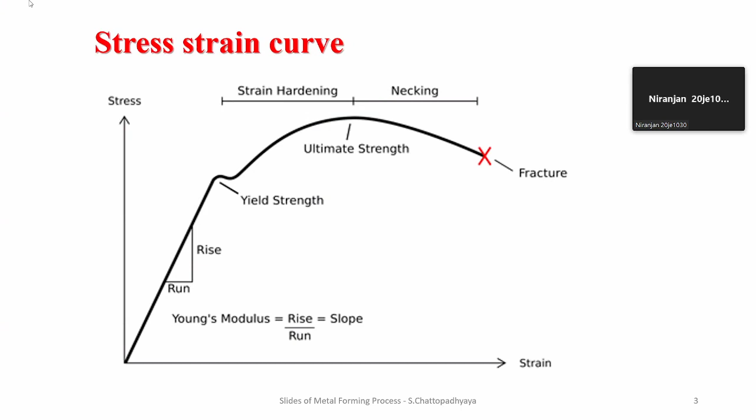Yes sir, you see, again it is the toe region, a little bit of non-linearity is there. And after that, up to this proportional limit, you will find it out. This is the linear region. And after that, up to yield point, if you can divide it in an expanded way, you will find it out. After one point, below yield point, you will have a little non-linearity.

And after that is the elastic limit. Beyond that, the permanent deformation will be there, a little bit of this kind of movement, and after that it is absolutely permanent deformation. And then in between that, we have to work. This is the ultimate one, and then it will come back as a rupture point. We cannot go to that limit because there is a possibility of it coming back again, and the possibility of rupture will be there.

So this is again a little bit of differentiation. This is proportional. The problem is with non-isotropic materials like rock and other things, this is not linear. That is why it is difficult to predict in case of non-metals and ceramics and rock related material, ceramic material, where there lies many non-linearities, and that is difficult to model.

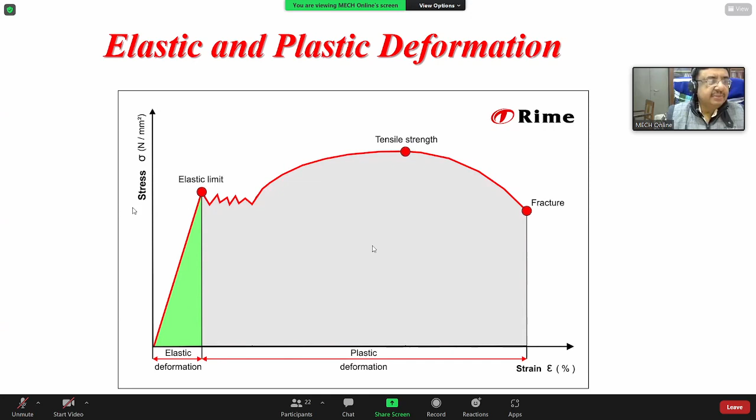So this is the case. It is expressed in Newton per millimeter square, force by unit area. This is the elastic region, this is the plastic region, and there is the fracture. Strain is represented in terms of percentage. Elastic limit, and their non-linearity and all sorts of things will come.

Then you will have this highest point, which is tensile strength. And this is our zone of operation, plastic deformation, but definitely in this side, not in this side, this side.

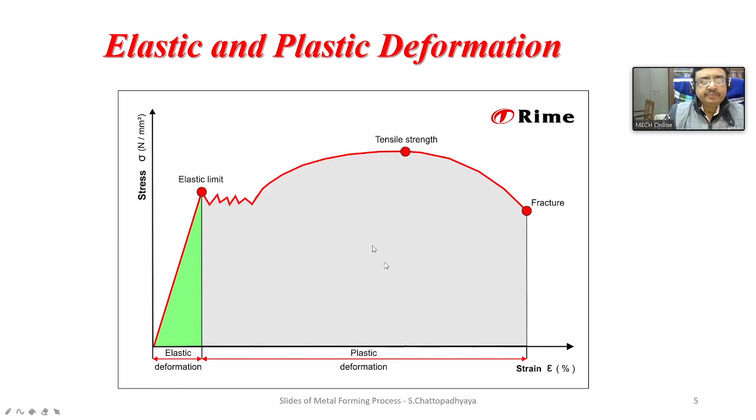So here is the elastic deformation, and this is the flow region. It starts flowing, so we have to calculate these flow stresses related to that, and that is relevant.

The flow stress is equal to K into epsilon to the power N, where epsilon is the strain and N is the strain hardening exponent. That way we will calculate. I will give you some numerical examples also.

And here the strain hardening will be there. Because of this flow, there will be some consolidation in the surfaces, and the surface will be hardened. Difficult to do some scratching, and this portion is known as strain hardening. Because of that, sometimes after machining, you have to go for a stress relieving operation. You harden the surfaces, and sometimes it is not needed because some stresses will be generated associated with that.

In many cases, you don't want that stress to remain, it has to be relieved. In case of machining of structures, one has to do some stress relieving operation and then go for the next machine cut. Why? Because if the stress is not relieved, it will be relieved at some point of time. And if there are holes and alignments important in order to put some shaft there, there is a chance of bending. So you have to stress relieve.

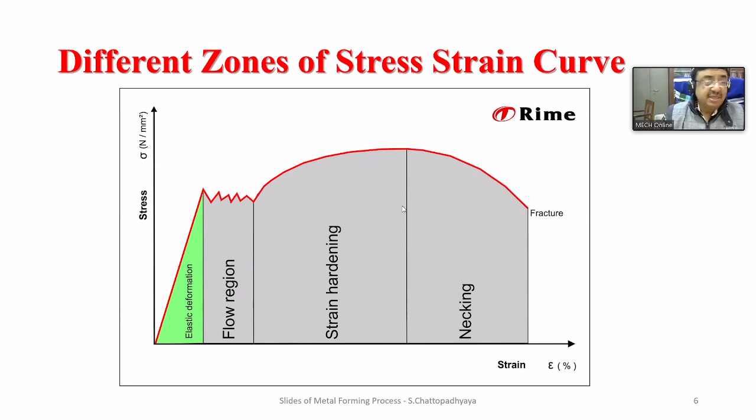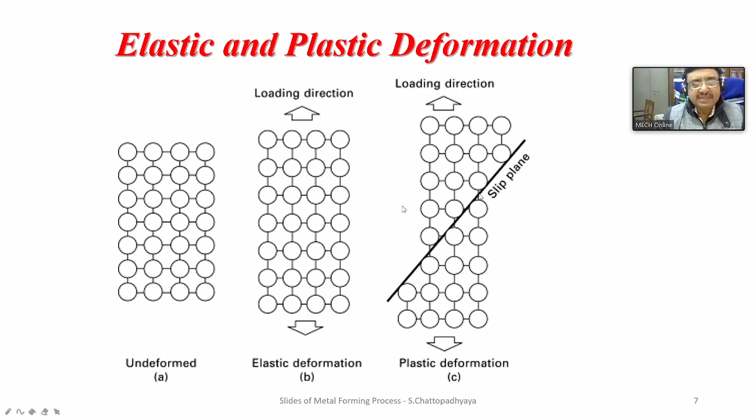Student, is it clear? Yes. So the yield strength depends upon the bond associated with that. Whenever you can give enough force so that you force this slip to occur, that will determine the yield strength. So molecule to molecule, alloy, whatever strength is there, depends upon how much force is really required in order to inflict this slip. And this is the slip plane.

So you can see the elastic, this is the proportional elastic. It is going there and coming back. Elastic deformation, little bit of shifting, but no slip.

Whenever you go beyond the yield strength, you are in the plastic region, elastic plus plastic. There is little bit of disorientation, linear disorientation, layer by layer, and little bit of slip. Beyond that, when stress is removed, it is total plastic, slip occurs.

That is a very good representation. This is the plastic strain, permanent change in the dimension, which we are interested about. Plastic strain will determine the formability of those metals and alloys.

Very good representation. Elastic deformation, elastic plus plastic, and it is totally plastic where slip permanently occurred. It will not go back to its original dimension, and this is plastic strain. Is it clear, students? You will appreciate this throughout your professional career if you are in the engineering profession.

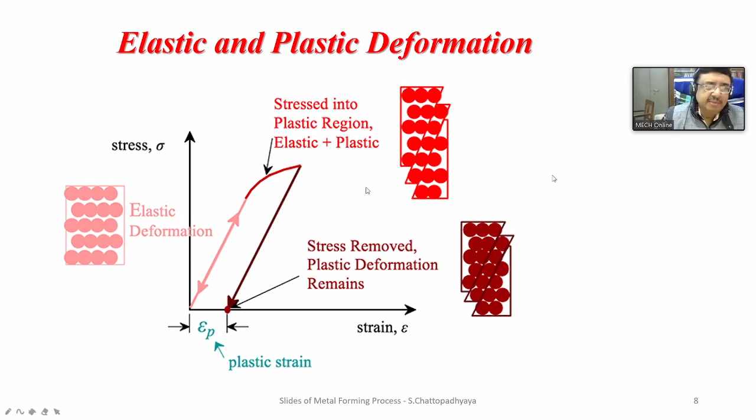But it is the plastic strain. Plastic means permanent. And that is what we are interested about, this plastic domain.

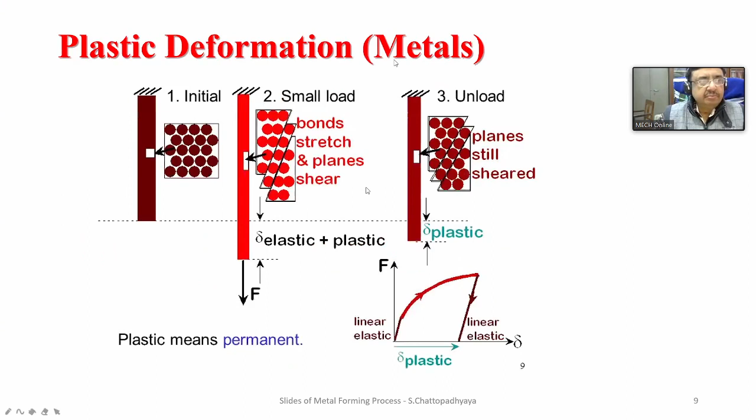So the difference between elastic and plastic deformation process: elastic is deformation which disappears on removal of load. But in case of plastic, it's permanent, which exists even after the removal of load.

So I want you to deform in a plastic way, so that your impression of understanding and knowledge will deform your mindset permanently towards the knowledge enhancement region.

So elastic is the beginning stage of deformation, initial. The plastic deformation comes after the elastic deformation. After this elastic zone is over, then and only then the plastic zone begins, after the yield point.

Clear? It is reversible, obviously, because it takes place over a short range of the stress strain curve and comes back. That is why it's reversible. Plastic is irreversible, takes place over a wide range, a small range versus wide range.

I can show you all those things in a YouTube video. It is irreversible and takes place over a wide range of the stress strain curve.

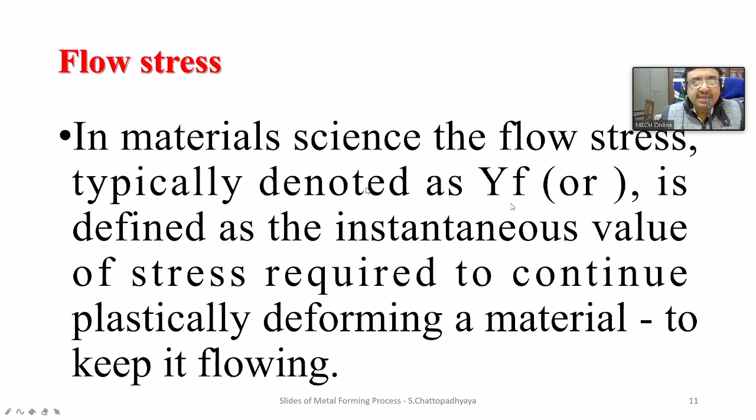Stress and strain in the flow curve are true stress and true strain. In the flow curve, it is true stress and true strain. So whenever you are explaining this thing.

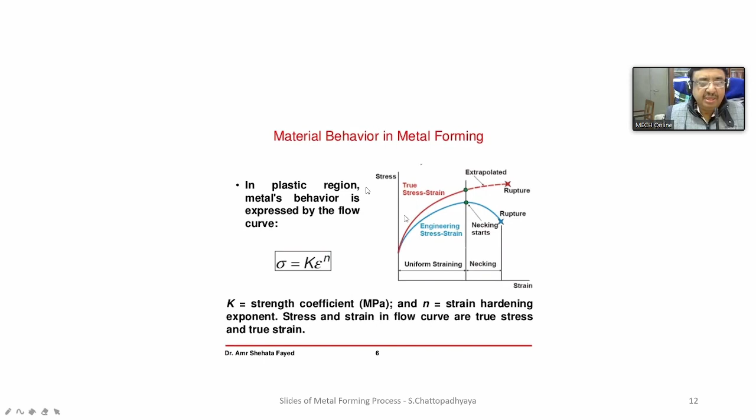So in this first section, uniform straining occurs up to the ultimate strength level, and after that, necking will occur. So engineering strain and the exponent behavior - this is true strain. Engineering strain follows this equation, and true strain and engineering strain relate as this.

So what is slip and twinning, which is occurring in the plastic regime? Slip is the shear deformation which moves atoms in one crystal plane over the atoms of the other by many atomic distances relative to their initial positions. A lot of distance is generated because of the slip, and that is known as slip.

Slip requires lower stresses, twinning requires higher stresses. A threshold value of stress called critical resolved shear stress is required for slipping to take place. Whenever we go deeper into metallurgy, we have to find out what is the critical resolved shear stress required for slipping. There is no such threshold value for twinning to take place, but for slip, there is a threshold value.

If you see the specimen, threadings are done on it. These threadings are done for grip purpose in the UTM machine, the Universal Testing Machine. Before we start conducting the experiment, initially you should note down some things: the diameter of the specimen, the gauge length has to be calculated, and the parallel length has to be noted.

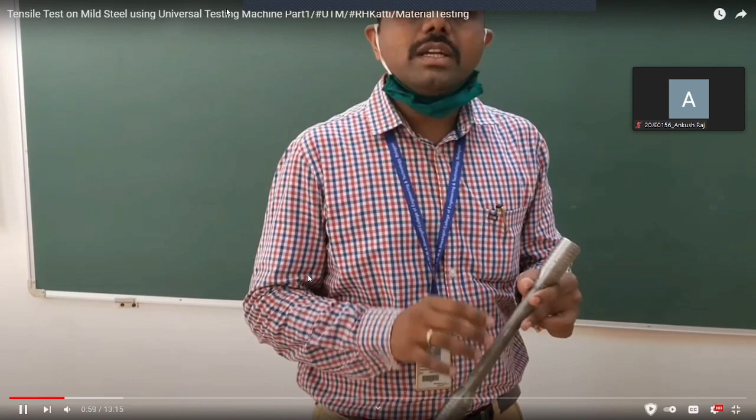Before I start conducting the experiment, you should know why the tensile testing specimen is done, and what you are going to obtain through this experiment. Once you conduct the tensile test on a mild steel specimen, we are going to find out the percentage elongation in the member.

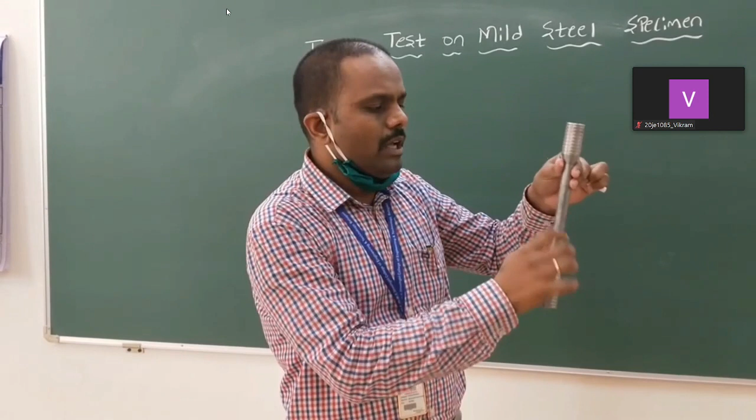When you apply the tensile load on the specimen it will elongate. There will be an increase in length of the specimen, whereas the diameter of the specimen decreases. You need to find out the percentage elongation in the specimen, and the decrease - as I told you, there will be a decrease in diameter. You need to find out the reduction in cross-sectional area, and you need to find out the Young's modulus of the specimen.

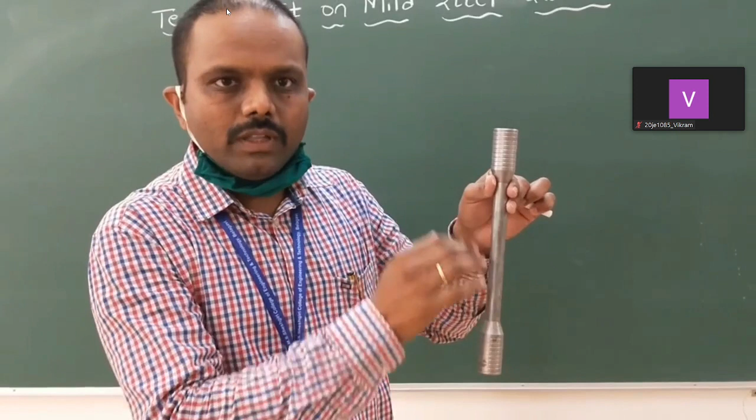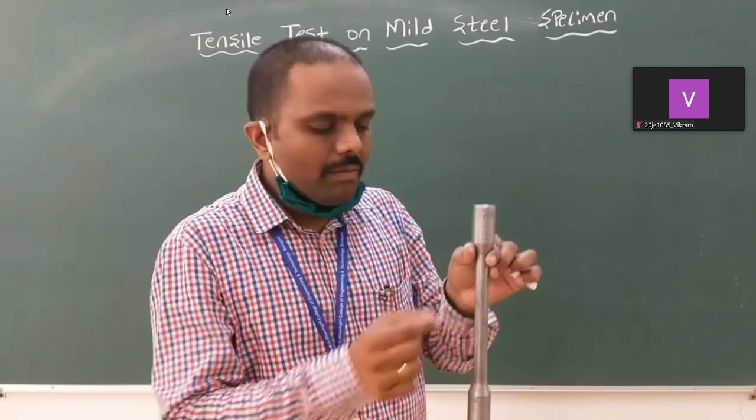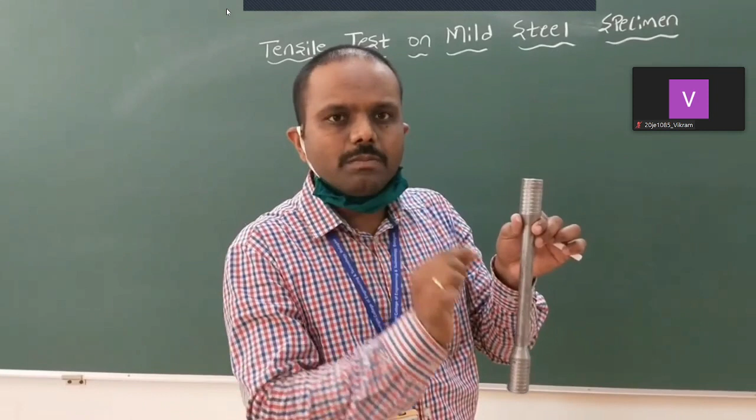During the experiment, when you start taking readings and draw the graph, you need to note down the percentage elongation, and find out the yield stress and ultimate stress the specimen is going to take. After that, we are going to observe the neck formation in the specimen. After neck formation, you will see a small crack on the specimen, and that crack will propagate, and ultimately the material will break into two pieces. You need to note down the fracture point, or the load at which the specimen fractures. This is how the experiment is conducted.

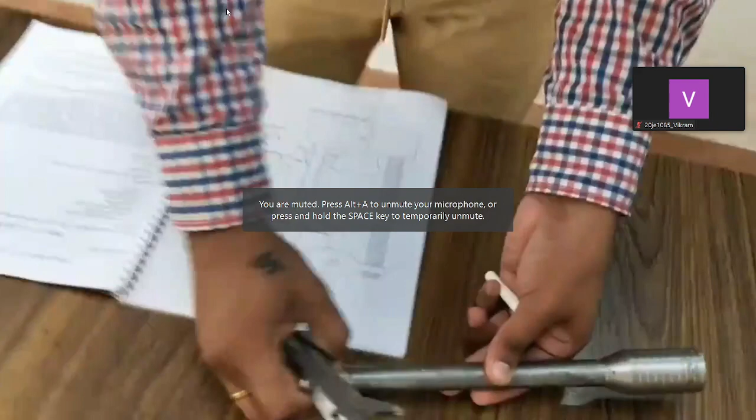Now I am going to note down the initial diameter of the specimen. Close the jaws. Here, by using the vernier scale, you need to find out the diameter of the specimen.

Now I am going to calculate the diameter. Here you can see that the diameter of the specimen is 18 mm. You can see the point - the specimen diameter is 18 mm. You need to note down the specimen diameter as 18.

Now I am going to find out the parallel length of the specimen. By using the vernier scale, I am going to find out the parallel length of the specimen. Close the jaws.

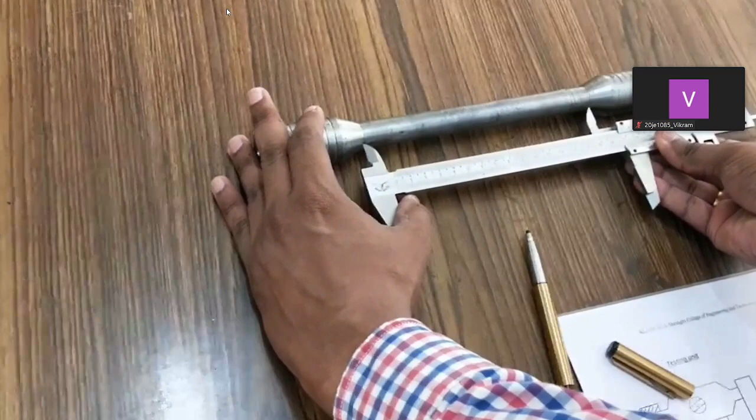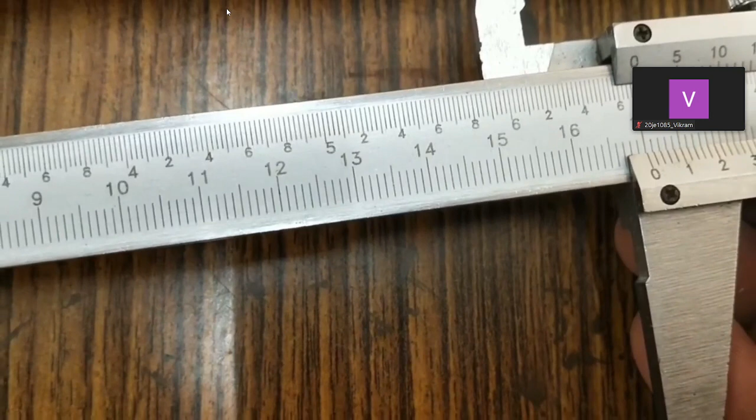Now you can see that the parallel length of the specimen is 170 mm or 17 centimeters. The parallel length of the specimen is 17 centimeters or 170 mm.

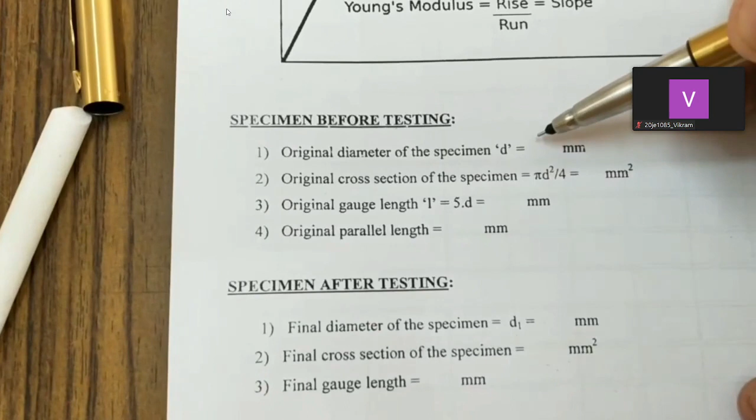Now this is the sketch of the specimen. In this we have measured the parallel length of the specimen, which is 170 mm. You need to note that down. We have also measured the diameter of the specimen, which is 18 mm. D is equal to 18 mm.

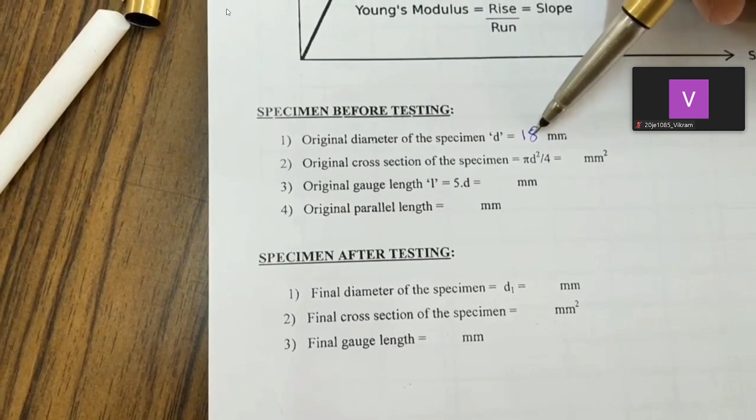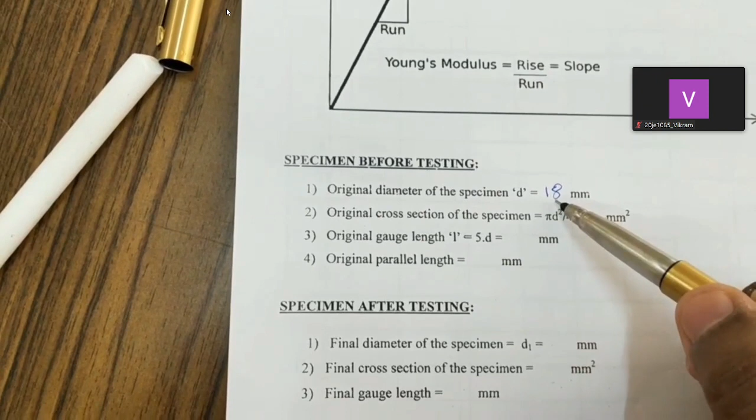The original cross sectional area of the specimen: substitute the diameter 18 and you will get it. Now the original gauge length, gauge length equals 5 into D. D is 18, so 5 into 18 is 90 mm. The gauge length we have calculated as 90 mm. Original parallel length we have calculated as 17 centimeters; you have to convert it into mm, so it will be 170 mm.

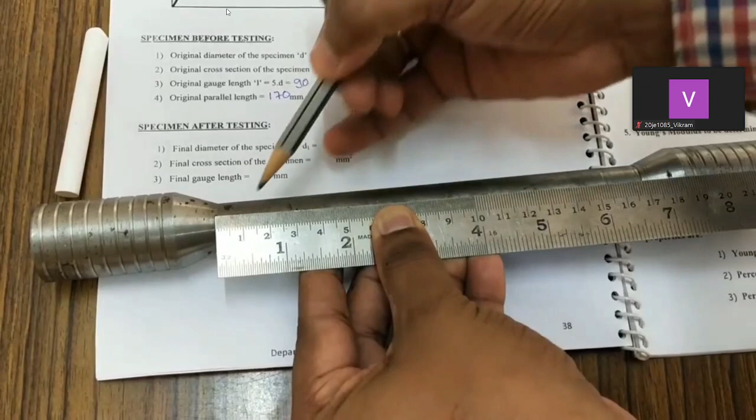Now I am going to make the punching marks on the specimen. The gap between the two punch marks I will make as 1 centimeter or 10 mm. You need to mark those things, and after that use the punching.

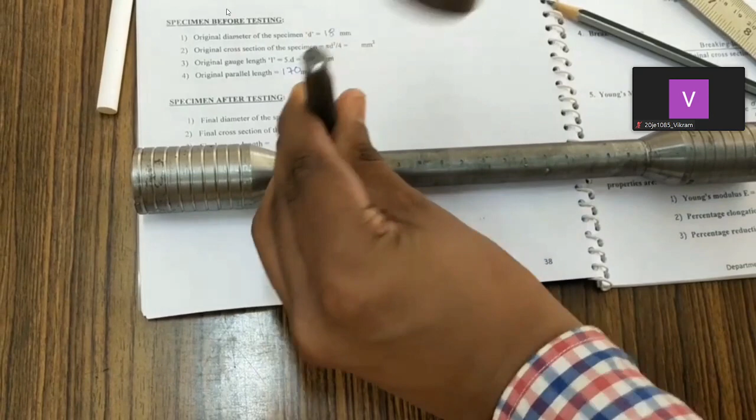Now you have to make the punches on the specimen by using the punch and hammer. Whatever marking you have done, on that you need to make the punches. Here you can see that I have already done the punch marks on the specimen.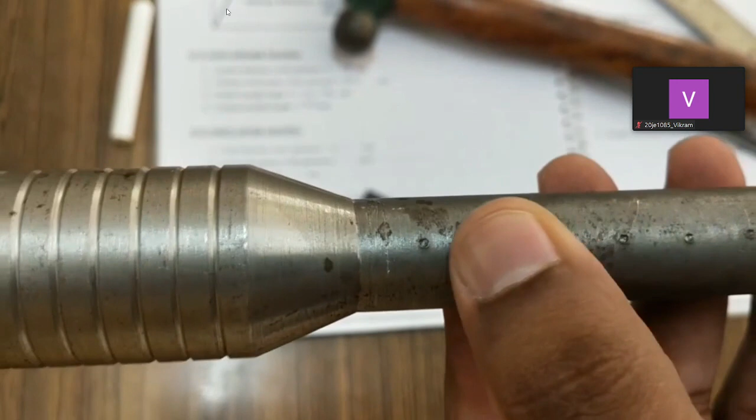Now I am going to take this specimen and load it in the UTM machine, and you need to note down the values.

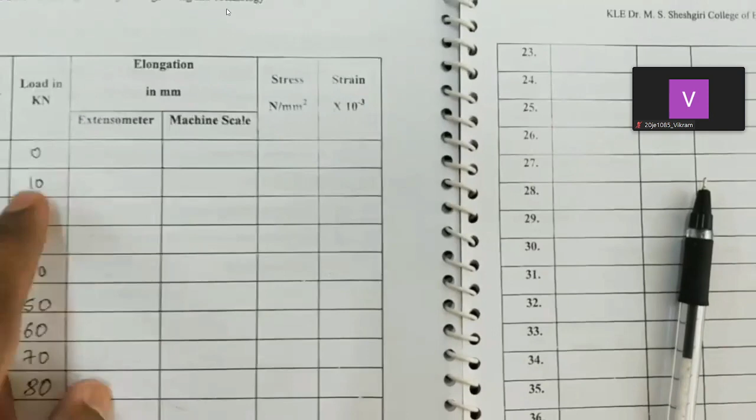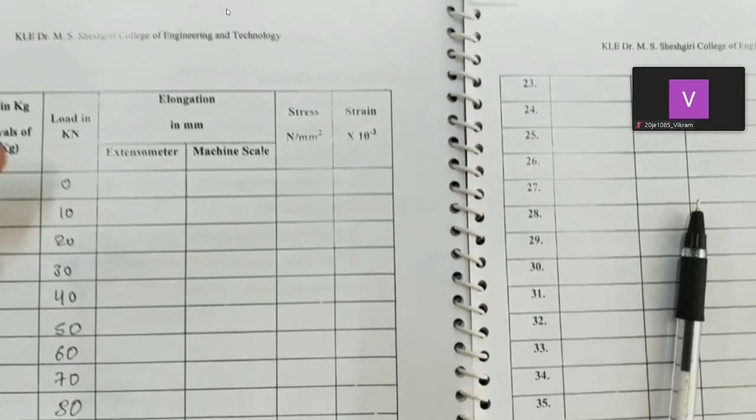In this tabular column, you need to note down the load applied on the specimen. According to the load, how much extension there is in the specimen, you need to note down. We are going to apply load at an interval of 10 kilonewton, and as a result, how much elongation you observe in the specimen, you need to note down.

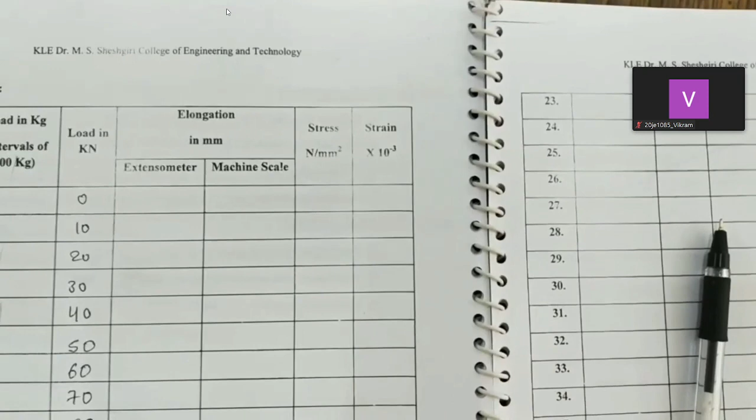Initially, readings are taken from the extensometer attached to the specimen. Why is the extensometer used? It is used to note down the elongation in the specimen. In the UTM machine we also have a machine scale, through which we note down the elongation in the specimen.

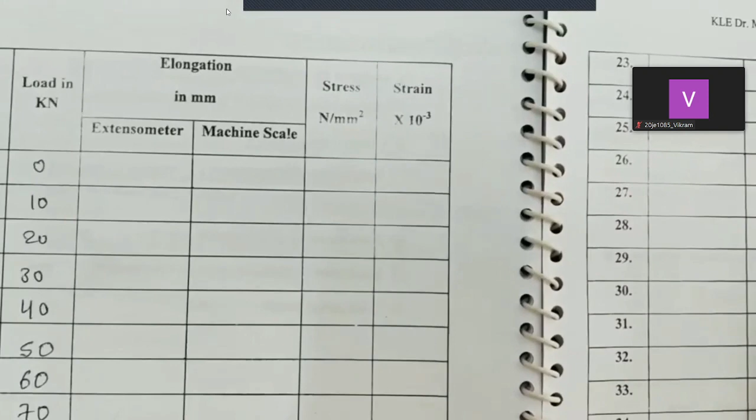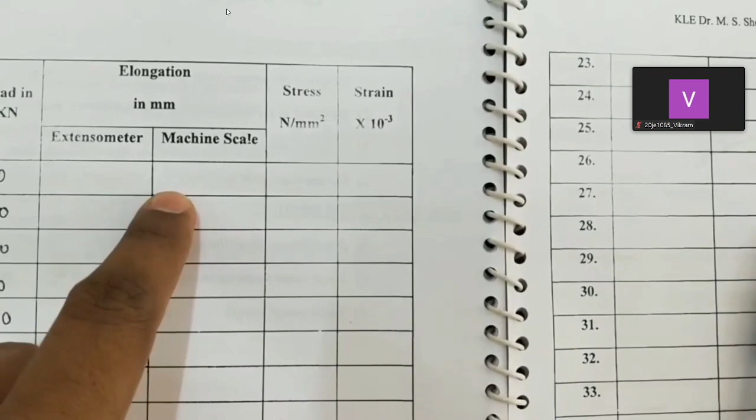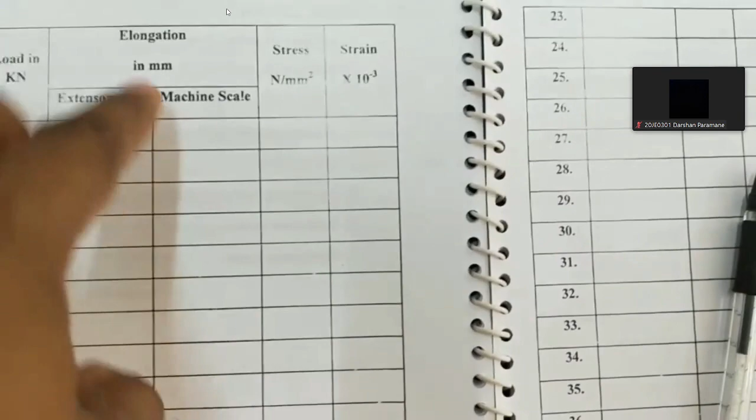But during initial loading, the elongation in the specimen will be like 3 into 10 raised to minus 2, which is difficult to measure using the machine scale. For that, initially we note down the elongation using the extensometer. Once it reaches the maximum load, we remove the extensometer, and further elongation is taken using the machine scale. This loading has to continue until the specimen fails or fractures. You need to note down the elongations.

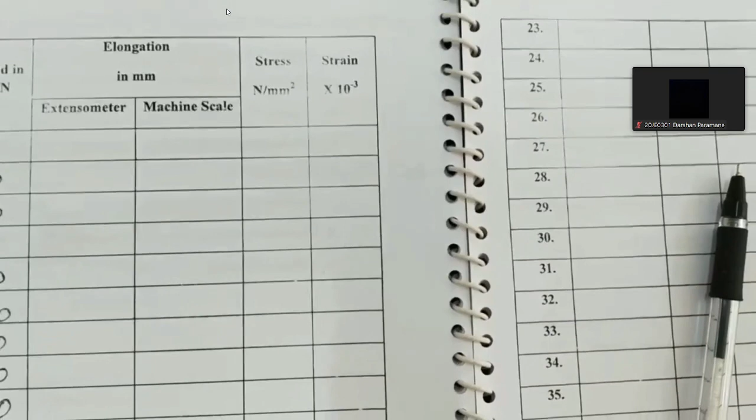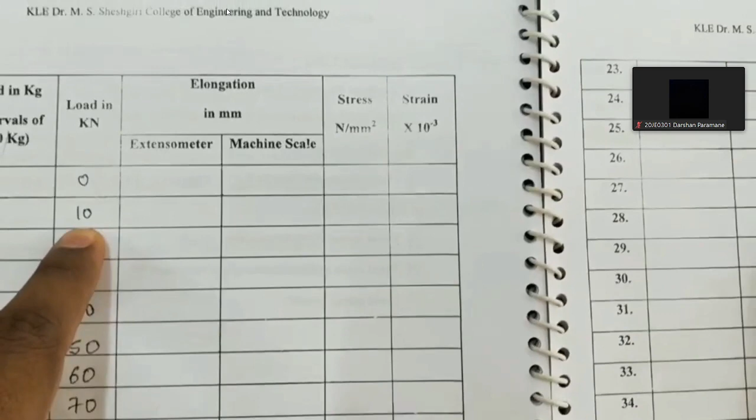Once you obtain the elongation, you need to find out the stress and strain. Stress is load divided by original cross sectional area. If you apply a 10 kilonewton load, how much stress do you observe? Therefore stress equals load divided by area. Load unit is Newton, area is mm square, so the unit of stress is Newton per mm square.

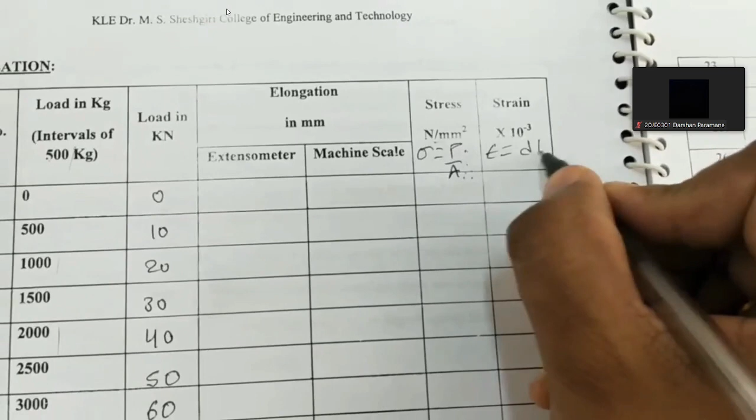Whereas strain is change in length to original length. This change in length is the elongation you observe. You know the original length of the specimen, and from that you obtain the strain.

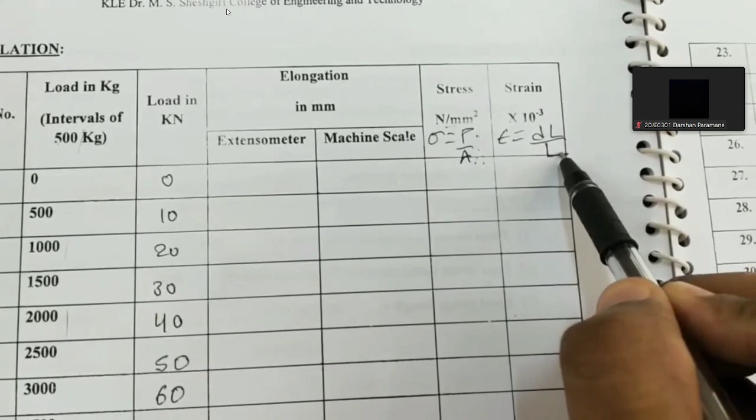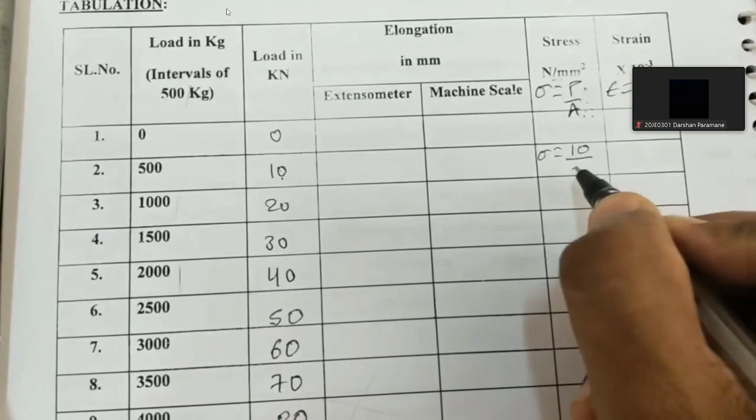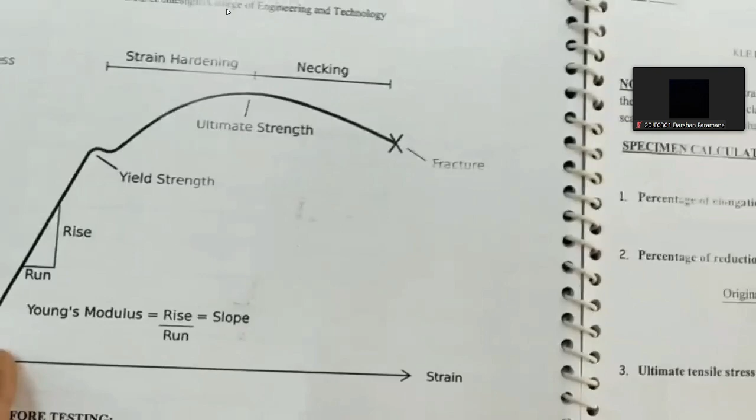For example, for a 10 kilonewton load, stress equals 10 divided by cross sectional area, pi by 4 times diameter 18 squared. From this you obtain the stress. Like this you need to calculate it for each loading, 20, 30, and so on, and after that draw the stress versus strain graph. From that you obtain the yield strength and ultimate strength of the material.

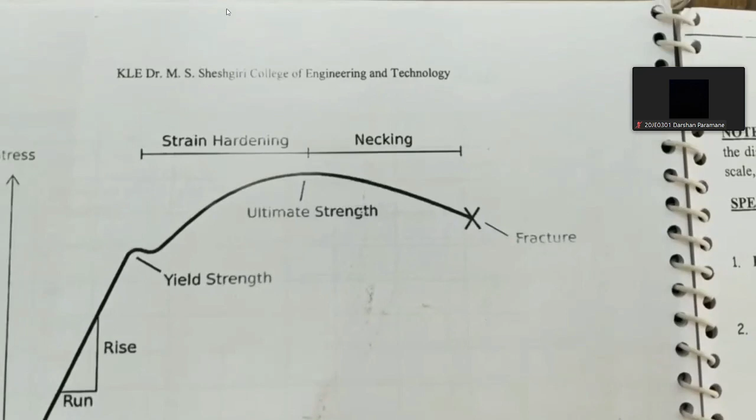Similarly, at this particular point when it reaches the ultimate stress, neck formation takes place, and at this particular point the material breaks into two pieces.

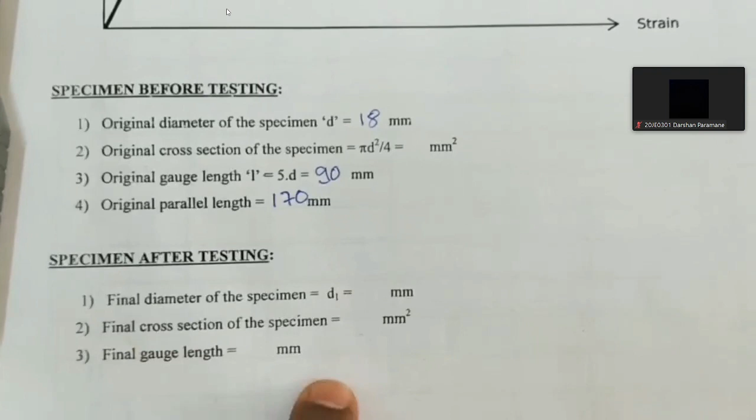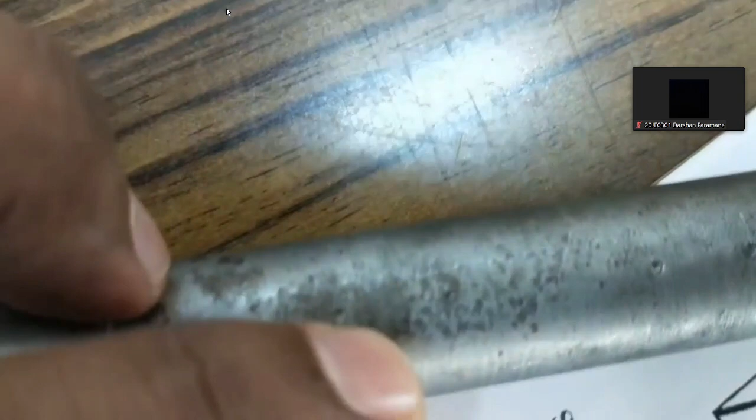After the loading, you need to note down the specimen measurements after testing. This is the final diameter of the specimen; once the specimen breaks, you need to note down the final diameter. Similarly, once you note down the diameter, you get the final cross sectional area. For the final gauge length, you already have the punch marks made on the specimen; through this you need to find out the final gauge length.

The member will elongate. Previously it was 90, and now the specimen is going to elongate.

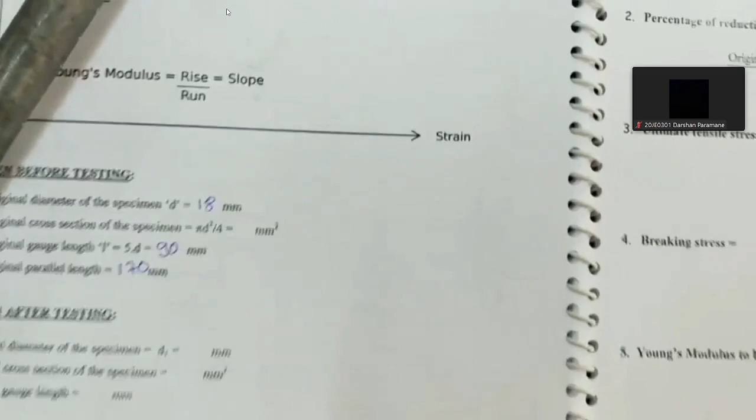Now I am going to take this specimen and load it in the UTM machine, the universal testing machine. I will explain the parts of the UTM machine. It consists of 3 parts.

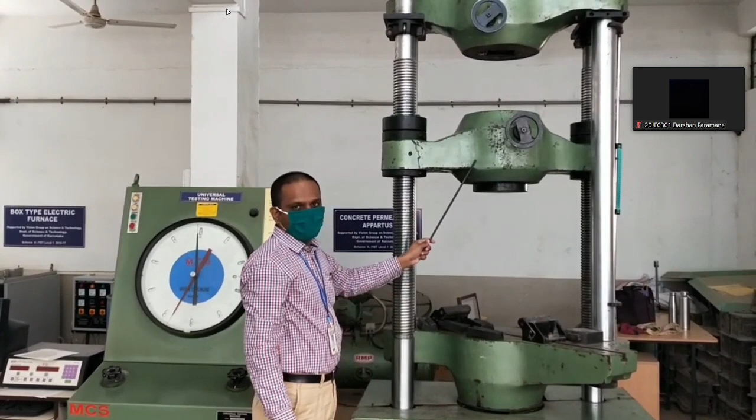That is the upper cross head, this is the lower cross head, and this is the intermediate or middle cross head. Here grippers are provided, where we are going to fit the specimen.

Here we are going to fix the specimen. Here grips are provided, through which it is going to load the specimen properly.

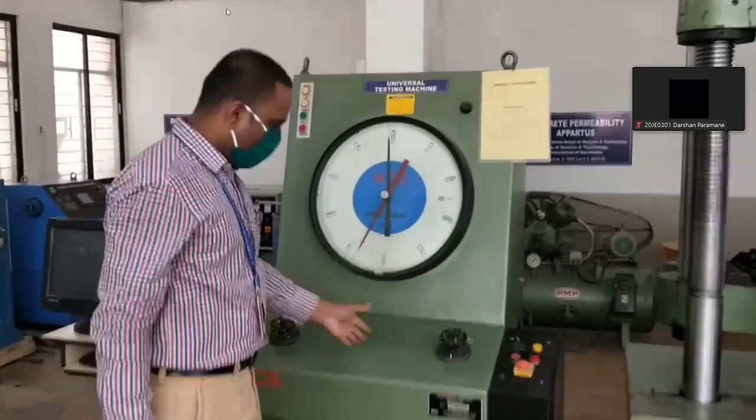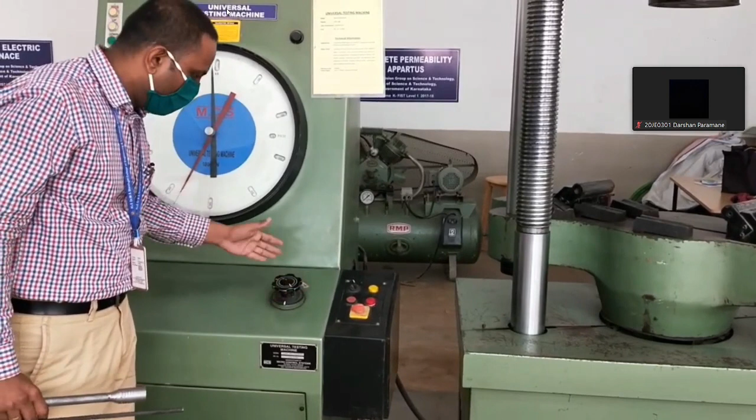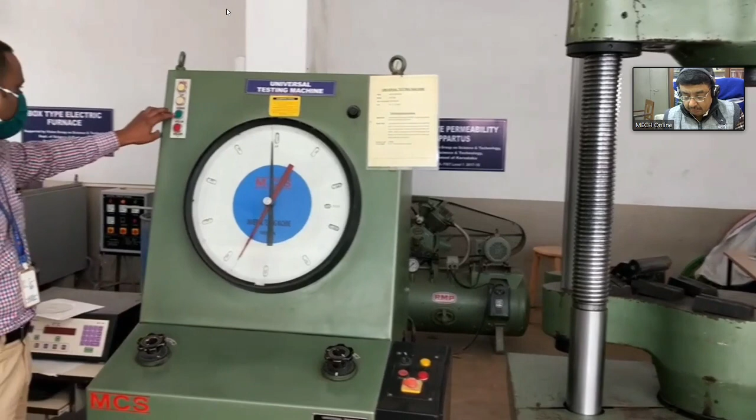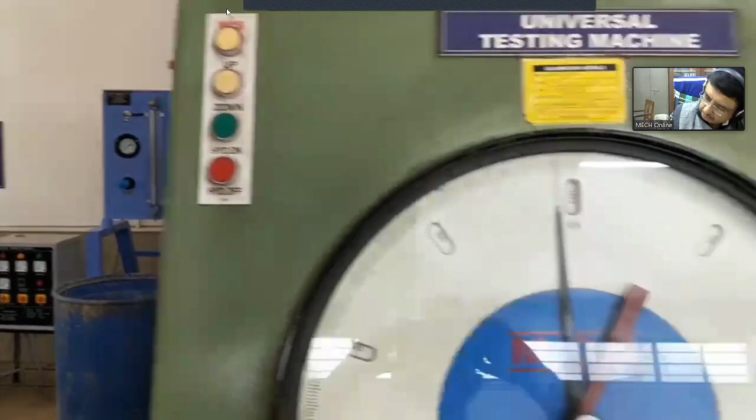After that, we need to lock such that the hydraulic is going to apply the load on the specimen. For that, first you need to move this in the anti-clockwise direction to apply the hydraulic pressure to the specimen. If you don't move this anti-clockwise, you are not going to apply any load to the structure. If you want to apply the load, this has to be moved to the left hand side, and once you switch on the machine, that is hydraulic on. If you want to turn off the machine, use this right symbol, that is hydraulic off. Whatever load you want to apply on the specimen, initially you need to lock this.

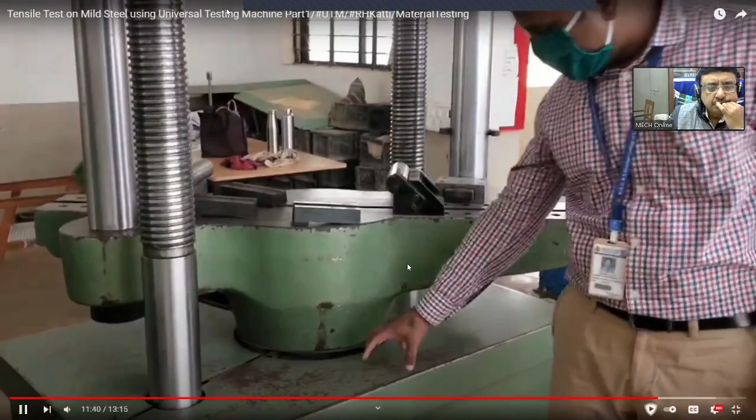After that, once you move it in the anti-clockwise direction, the dial will show how much load is applied. This entire setup consists of a hydraulic system with a piston and cylinder. As you increase the load, it applies pressure and the piston starts moving, as a result of which it applies the load on the structure. This is the screw column. It consists of 4 columns: 2 screw columns and 2 plain columns.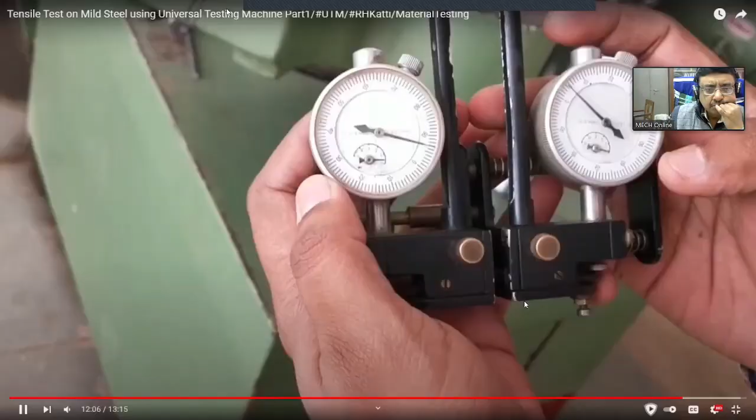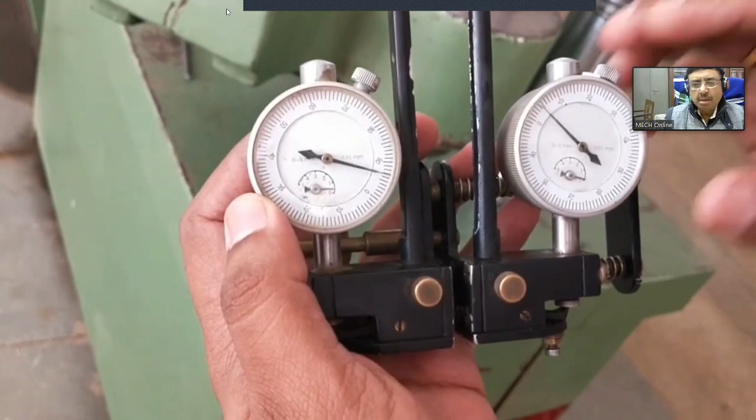This is the extensometer, which is used to measure the extension in the specimen. As I told you, when you apply the load, the initial extension in the specimen will be less, which cannot be measured through the machine scale. This is the machine scale, and it's difficult to note down the elongation in the specimen using it. For that reason, we attach the extensometer to the specimen.

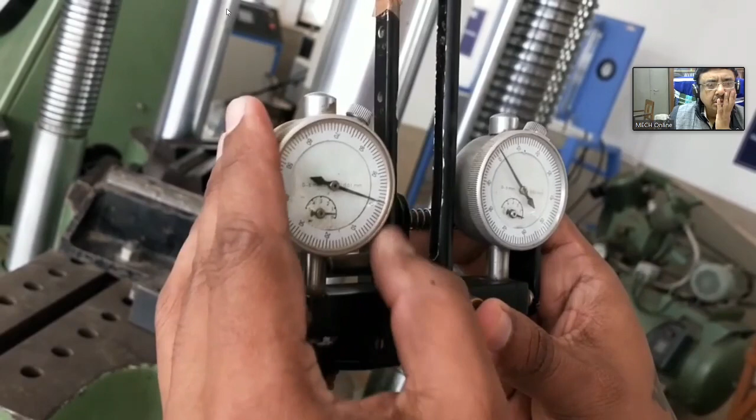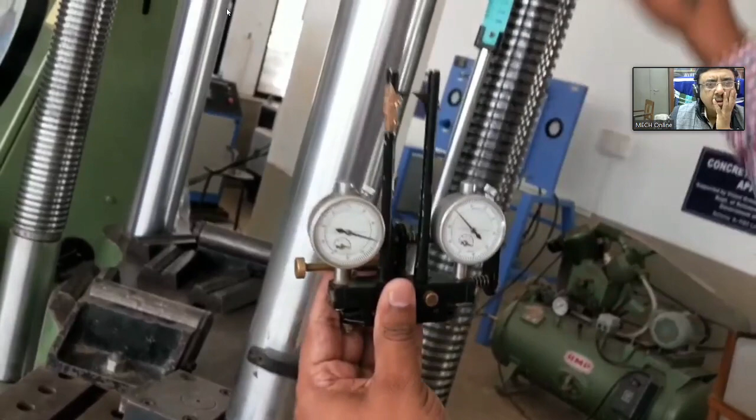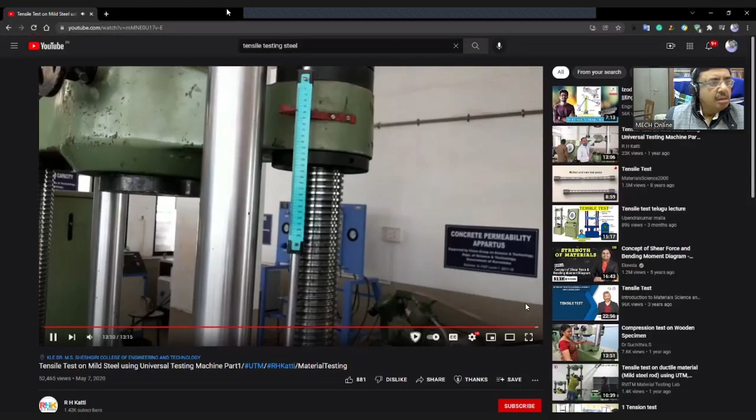If you see the extensometer, initially you need to adjust it to zero. Here you can see I am adjusting it to zero, both dials. Now I have adjusted it to zero. Now you can attach this to the specimen, and once it reaches the maximum load, you have to remove the extensometer. Next, the readings will be taken through the machine scale. This is how the experiment will be conducted. In the next video, I will apply the load until the specimen breaks, note down the values, and show you how to take the readings.

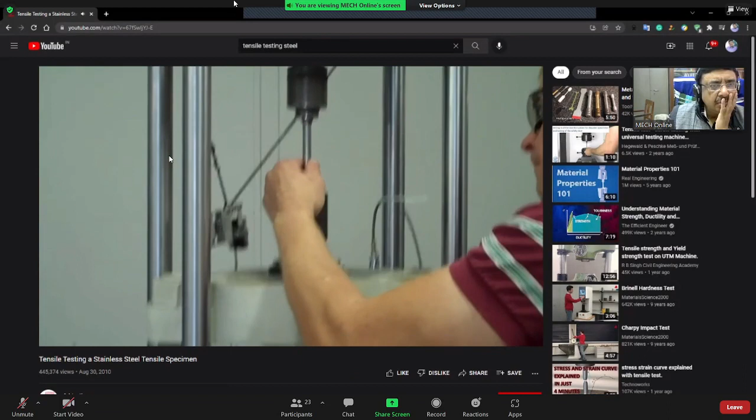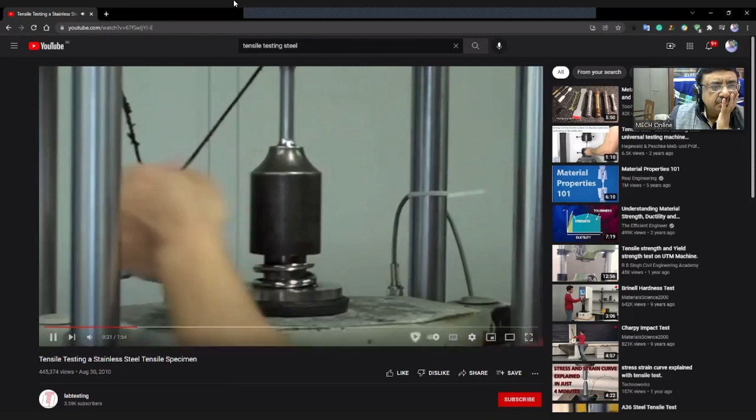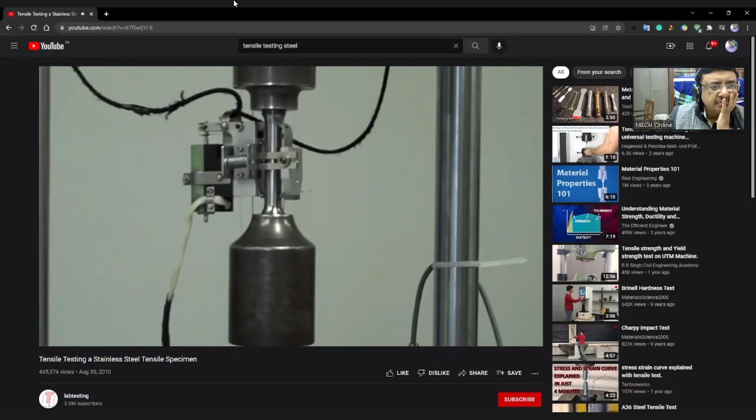Conducting tensile test on a 0.500 diameter tensile specimen, stainless steel material. Engage the tensile specimen between crossheads. Apply extensometer to determine yield strength of material. After yield strength has been determined, remove the extensometer and continue the test to failure.

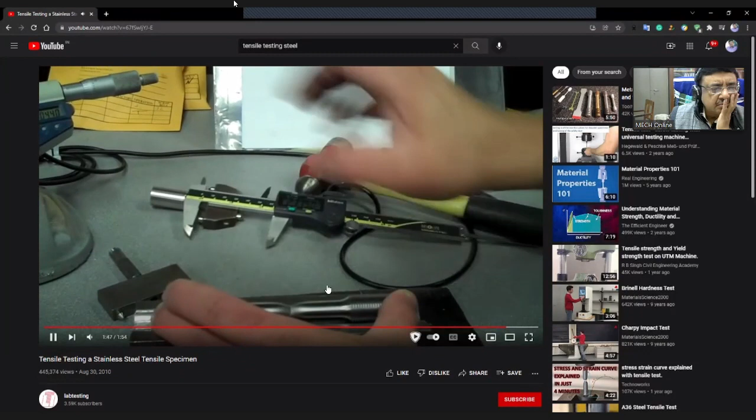Students, have you seen that? That is also in your... I think it will be shown in the strength of materials lab. But for every property of... sorry, just a minute, sorry, one minute.

So for the material, whatever we want to deform plastically and permanently, we have to test the yield strength and other properties. We have to do this experimentation at elevated temperature to know what the yield strength will be at elevated temperature. On the basis of that, a critical decision has to be taken on whether we go for hot forming or cold forming. So knowing these elastic and plastic deformation values for the materials we want to deform for the bulk deformation process is absolutely important. On the basis of that, the critical decisions are taken, and once we are established with this process, we can manufacture for the world.